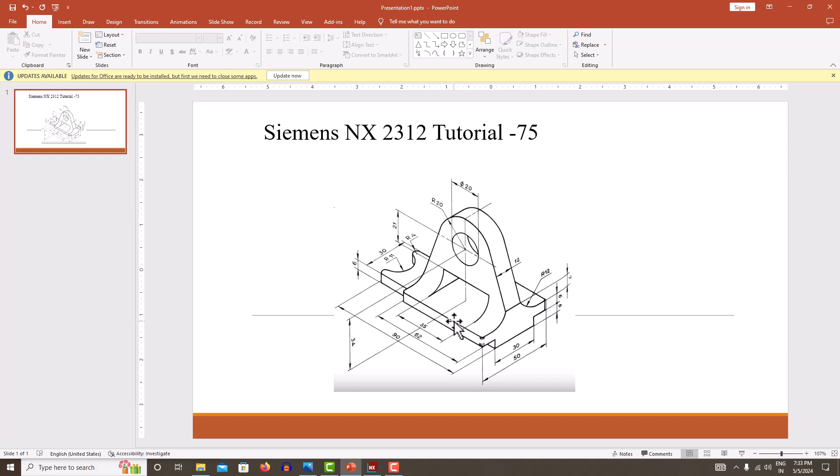In this tutorial, we are going to model this machine component using NX. While modeling any component in NX, first do the add material feature, then go for the remove material feature. This same component I have modeled in NX, this is the model. Now we'll recreate this component using NX. These are the steps I have followed to create this component. Now we'll learn step by step how to create this component in NX.

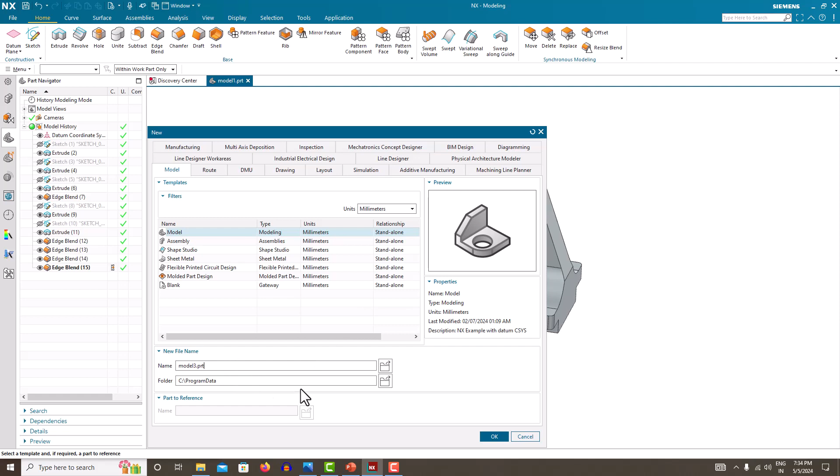First go to the file, new, choose model, our units are in millimeter, choose millimeter, specify the file name, specify the location, say OK and OK. Now we'll start modeling this component.

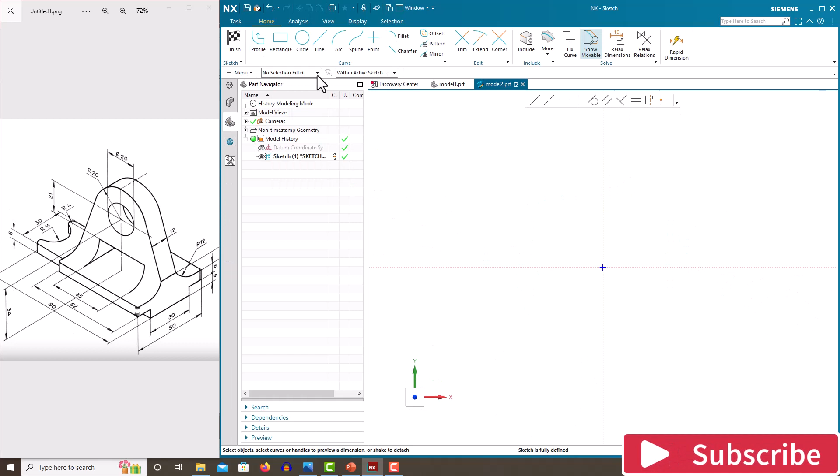First we'll start with the base plate with a thickness of 6 mm. First go to the sketch. I'm just choosing a top plane, say OK. Take this rectangle like this. Now this length, which is 90 mm. Do you want to scale the entire sketch? Yes, press the roller to confirm. Now this width is 30 mm, press the roller to confirm.

From here to here, the distance is, here you can see total length is 62, then this will be 31, press the roller to confirm. Now make it symmetric, this one, this one, this one. Say OK, now see the sketch is fully defined. Then go for the finish sketch. Extrude, make it symmetric value. The thickness is 6 mm. Say OK, now we have created this base plate.

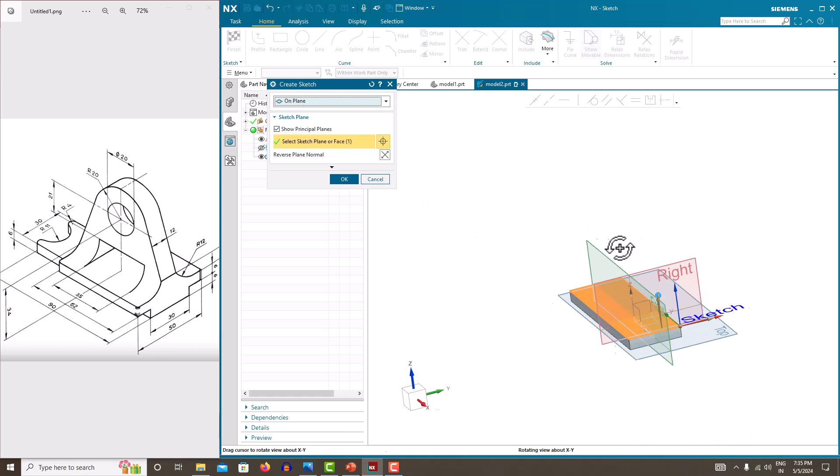Then we will create this plate with a thickness of 6 mm. For that, go to the sketch again, select the surface, say OK. Now take the rectangle again, just create the rectangle. Total width is 50, say yes.

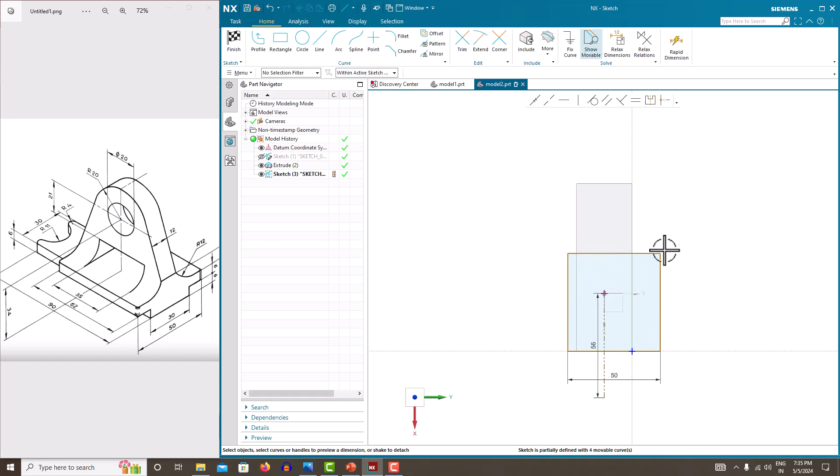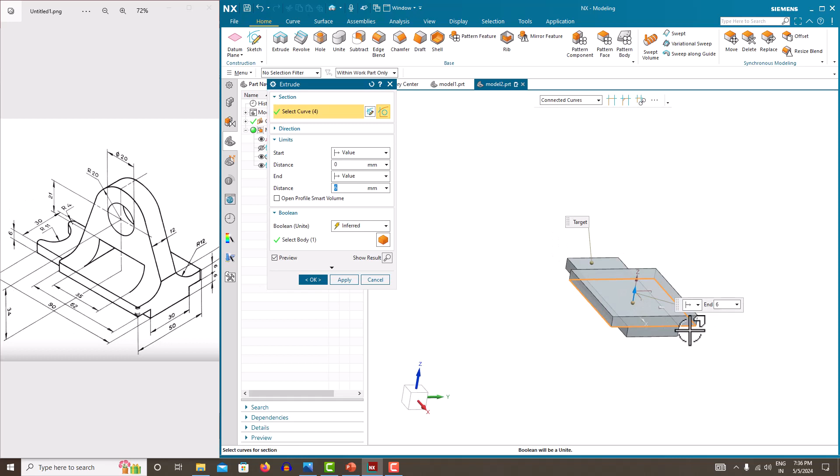Take one line, go to the entire assembly, just create one line, make it this some dimension. Make it construction, this is the axis line. Now just make this line as symmetric, this point and this point and this line. Go here, just press OK. Now we made symmetric. Then the length is 62, press the roller to confirm. This one is 50 and 62. Just go for the finish sketch. Extrude, one side, same 6 mm. Say OK, now we have created this feature also.

Then we'll create this feature. For that, go to the sketch, choose the front plane, say OK. Now take a circle, just create one circle, press the roller to confirm. The diameter of the circle is 40.

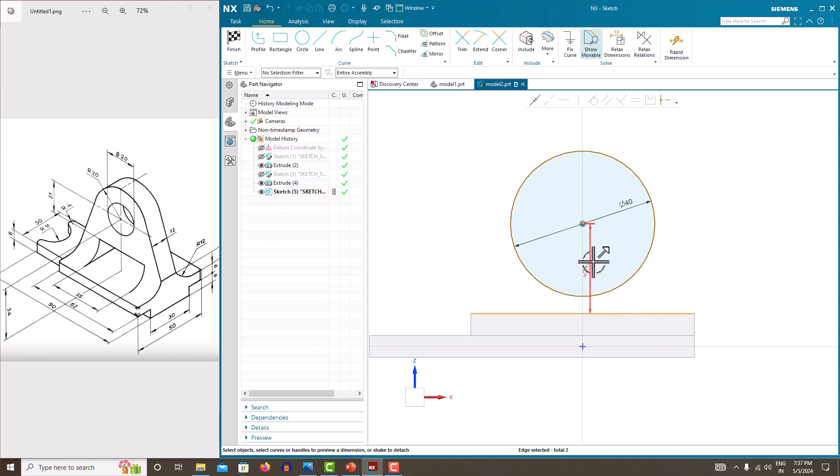40, say no. Now the height has to be defined. The center height is, here you can see 34 mm from the top plate, this surface. So from here, make entire assembly, here the distance is 34, press the roller to confirm.

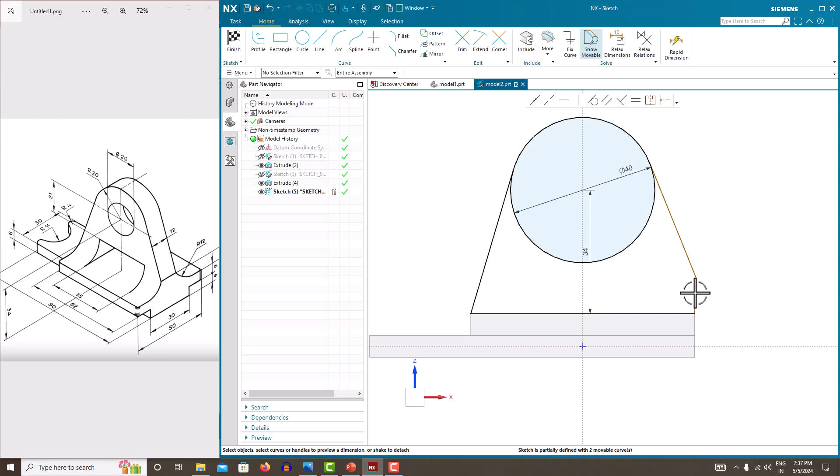Now take a line, tangent line, just connect with this point, then press the roller to confirm. Here also just make a tangent line, here connect with this one and close the sketch. Press the roller to confirm. Again press the roller to confirm. This line you make it a vertical line, and this line height is 7 mm, here you can see this length height is 7 mm.

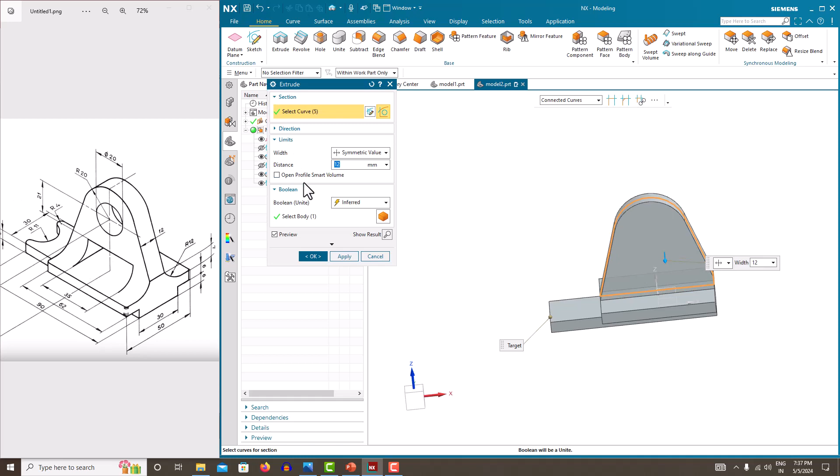Now remaining edges you remove it using a trim tool, just trim it, then close it. Then go for the finish sketch, then extrude, make it symmetric value. The thickness of the plate is 12 mm. Say OK, then hide the sketch. Now we have created this feature also.

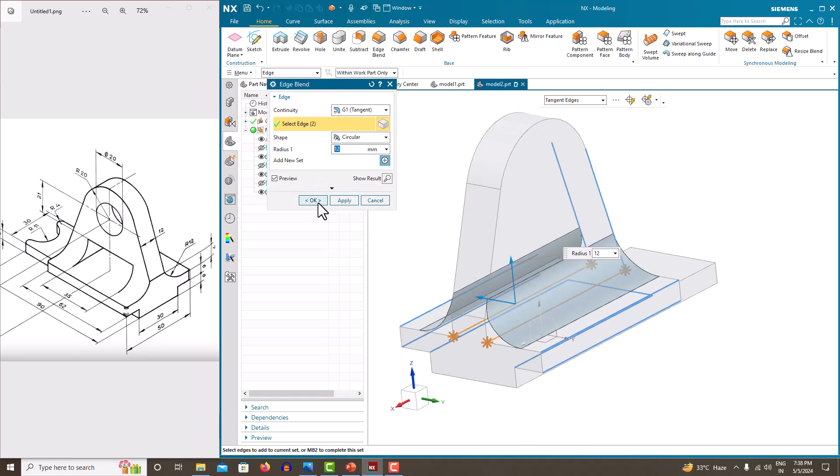Then we will create the round with the radius of 12 mm. Then go for the edge blend, this edge, and rotate it, and this edge, which is 12 mm. Say OK, now we have created this feature.

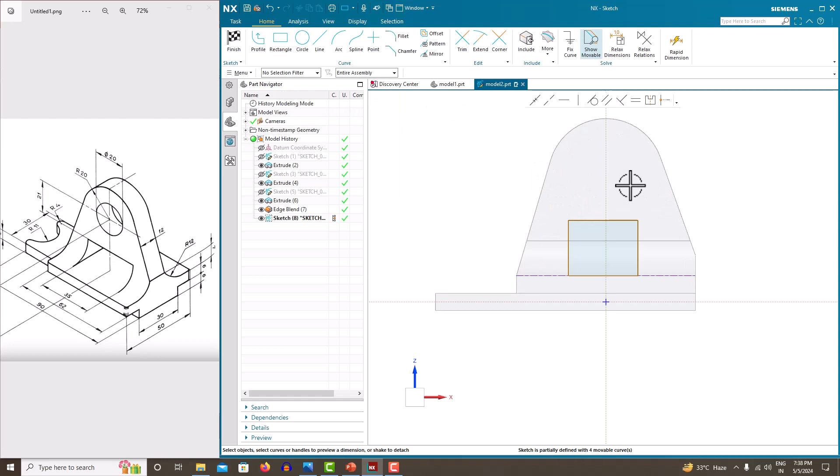Then we'll go for the material removal of these two features. For that, go to the sketch again, select this front plane, say OK, take a rectangle, just create one rectangle, use entire assembly. Now take a circle also, from here, just create one circle. The diameter of the circle is 20, press the roller to confirm. Then this distance is 35, press the roller to confirm.

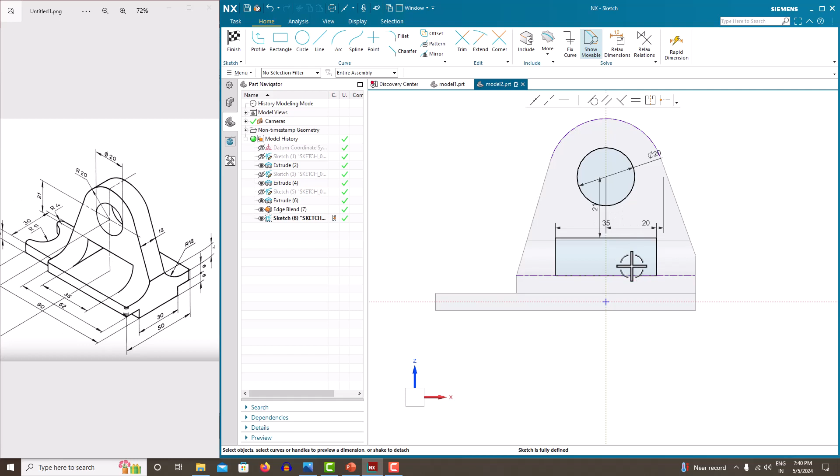Then from this point to here, make it symmetric. Say OK, and from here to here, the distance will be 21. Now this dimension is adjusted. Then just this point, click this coincident, just click, go for entire assembly. This point, yes, this point and this point, we make it coincident, and this distance will be 21. Now you can see that all the sketches are fully defined.

Then go for the finish sketch, extrude. Here we make it a symmetric value. Simply just enlarge this one. Here we make it a subtract. Simple, now we have created this cut.

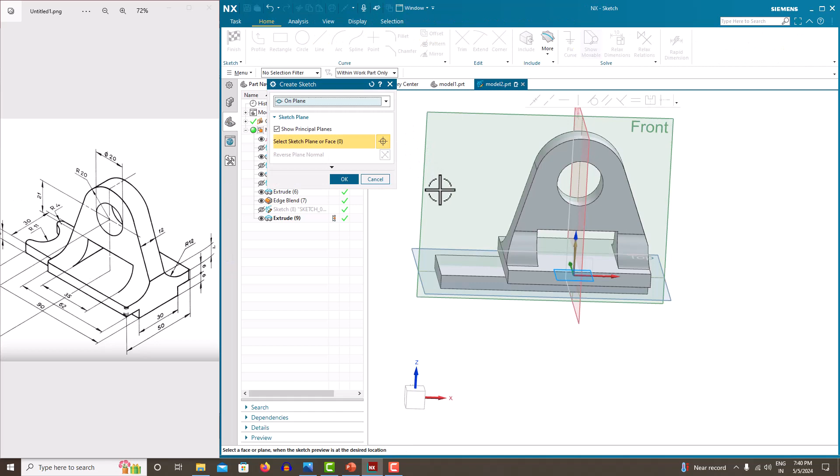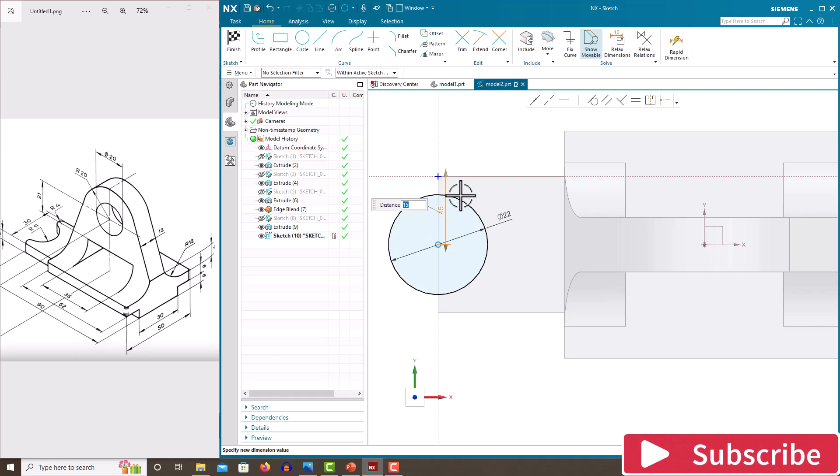Then hide the sketch, then we'll create a cut here. For that, go to the sketch again, select the surface, say OK. Now take a circle, just create a circle like this, and the diameter of the circle is 22, say yes, press the roller to confirm. From center point to here, the distance is 15, say OK. Then go for the finish sketch.

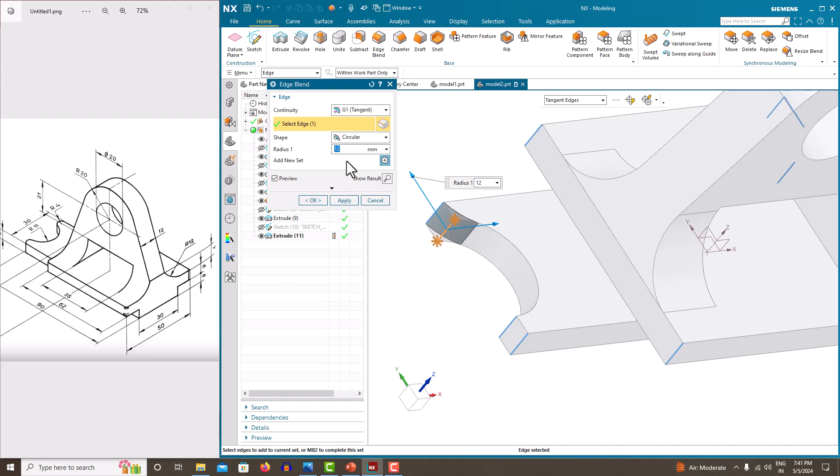Extrude, change the direction, until next, subtract, say OK. Just hide the sketch, then go for the edge blend. Select this edge, here the radius is they have given 4, then give 2. And choose this edge also, similarly this edge and this edge. Say OK, now we have created this feature also.

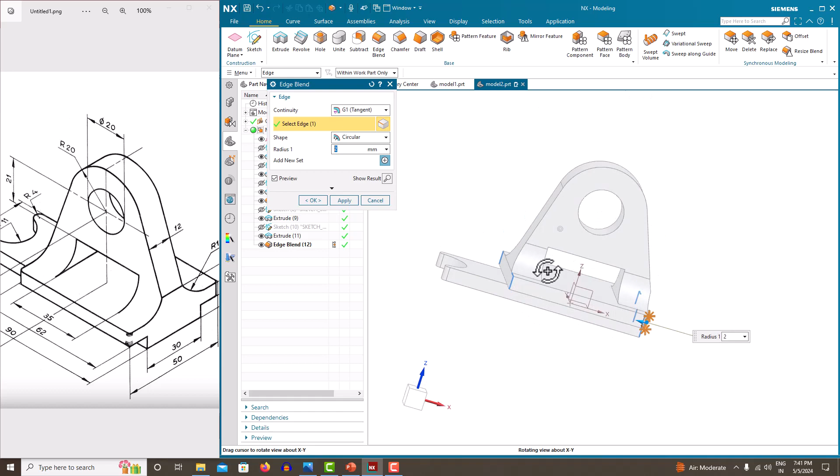Then we just want to create a round here, this corner. Go for the edge blend again, select this one, this one, this one, and this one. Say OK. Now just right click here, go for the orient view, isometric view.

Now in this tutorial we have finished this component.